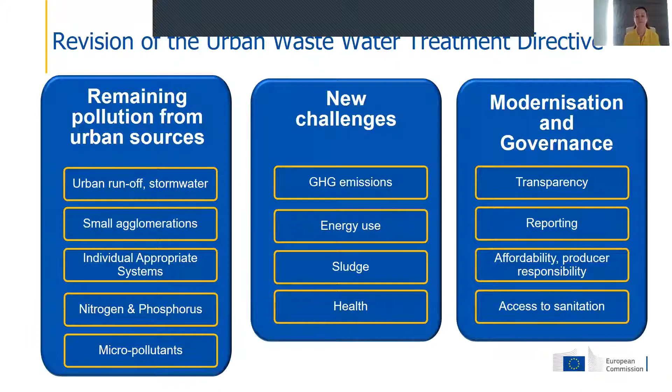I point out that for collecting systems, whereas they aren't as predominant as for wastewater treatment plant facilities, there's embedded carbon, there are direct emissions, and the energy usage of conveying flows to treatment. And under modernisation and governance, to point out that digitization does lend itself to more effective and efficient operations, monitoring and reporting. So with remaining pollution, in the evaluation, we did quantify what these other areas of pollution that could be further addressed going forward would be.

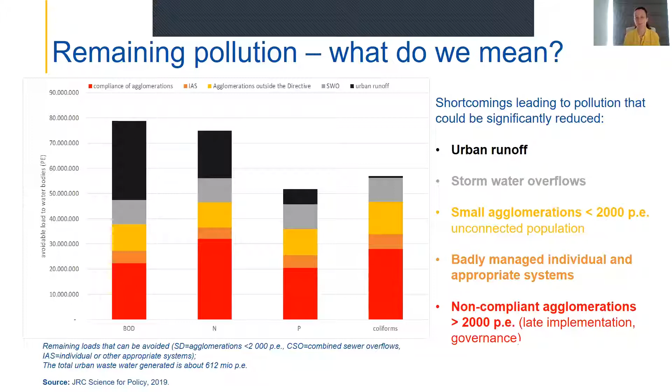5 main areas. We quantified them in terms of load for BOD, nitrates, phosphates and coliforms, including urban runoff and stormwater overflows. There's also issues with non-compliance with the current directive, small agglomerations and small individual and appropriate treatment systems. So we have a basis going forward, because everything we do is evidence-based, whether it's to do with the science and the modelling or cost-benefit analysis.

And also of relevance to point out would be, and this is from the second River Basin Management Plan cycle, 2016, both stormwater overflows and urban runoff are significant pressures, and they could be expected to increase due to further effects of urbanisation and climate change. Obviously, the situation can differ from one wastewater agglomeration to another, depending on local conditions and how the collection system in place would operate. So a revised directive could directly contribute to achieving objectives of good ecological status and good chemical status.

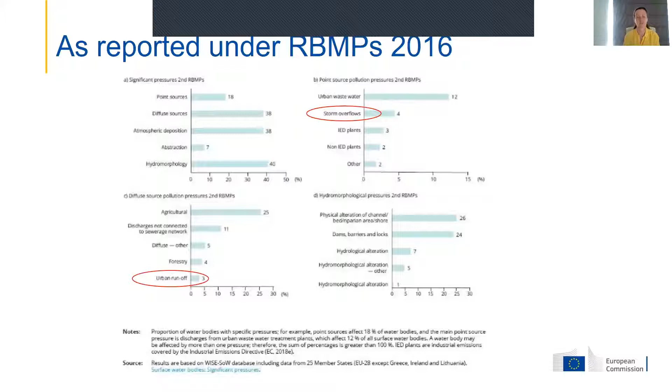Again, to wrap up, and looking forward towards some possible solutions, again, from our previous stakeholder engagements, which some of you may have been involved with, we have presented an outline of approaches that can tackle stormwater overflows and runoff. So there is the strategic, integrated approach. There are some very good EU examples out there, but it wouldn't be the case that at the moment it's systematically applied across all member states. The approach lends itself to better planning of infrastructure, leading to the delivery of infrastructure that is fit for purpose and future-proofed as much as possible.

This approach does require a number of competencies, including wastewater operators, urban planners, those responsible for monitoring water bodies, for example. It could include a lot of collaboration and coordination across various stakeholders at strategic and local level. It can reduce the amount of stormwater runoff collected through source control. There's an opportunity also to treat urban discharges more locally. And a lot of this type of work that's in place already requires a lot of mapping, predictive modeling, and even real-time control. And that covers the first policy.

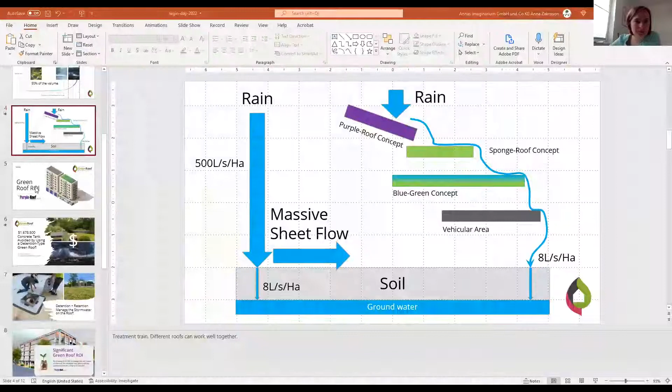And one thing some of the green roofs also provide, not all of them, is a detention capacity. We've spoken a little bit earlier as well about stormwater management. So detention can basically reduce, maybe I can just show you a slide on this because it's much easier to understand if I just show this. Otherwise it becomes so hypothetical. So let's see if I can get the right slide up.

But then we still have about 50% of the volume represented by 20% of the events, and these are the ones that are extreme weather events. You can see a microburst here on the picture. And they basically cause flooding. And when these events occur, the green roof can be oversaturated, or maybe it's a multiple day storm event where the green roof is already saturated when it starts raining.

So for this, we need a capacity of the roof that is basically slowing down the runoff. Different types of roofs can achieve this, like blue roofs, blue-green roofs, purple roofs, and so on. So this is a different issue. So there are two stormwater issues. One is the reduction of the annual volume that ends up in the sewers, which is really positive for the cities. But then there is also what I would see more as a project related issue where you need to satisfy the requirements of your stormwater engineer.

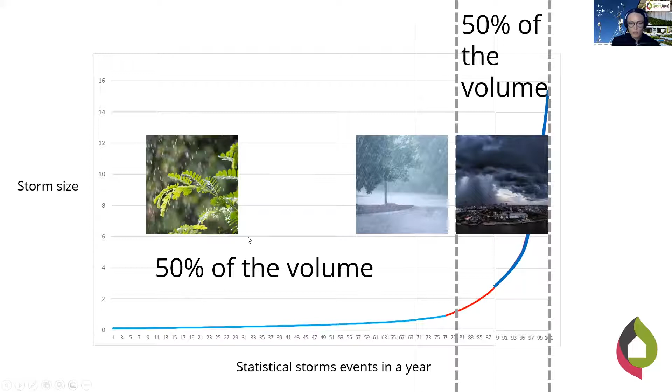That can be, for example, through a stormwater tank with an orifice restriction, so that you know the outflow is always within the limits of 8 liters per second and hectare, which is common in most cities. Manage your stormwater on a roof, which basically means that the space on the ground can be used for other development or whatnot. So I can maybe show you a picture of this.

For example, we had examples in New York City where they had massive stormwater tanks underneath the building. So you can free up that space, manage stormwater on the roof, and then you have a lot of space available for income generating activities that can create an ROI for the roof. But in order to do this, we need really, really solid data, because stormwater engineers are not satisfied with gut feelings or hunches.

And another thing is that the runoff coefficients currently in use, especially here in Germany, if I may speak frankly, are not actually useful for green roofs. They were developed in order to size pipes. So when they're used for green roofs, we do not really get the full story. Especially with detention type roofs, because the runoff coefficients assume a linear relationship between what is going in and what is coming out of the roof. And if the whole point of the system is to have a built-in delay, there's no linear relationship anymore.

So the runoff coefficients are something that I hope will be abandoned at some point, and proper stormwater modeling will be used, which is used in most other stormwater purposes. It looks very different from country to country within the EU as well. But this is something that I think would be very useful for everybody, because it also opens up the possibility for an ROI, especially for detention type green roofs. Yeah, that's maybe what I have to say about that.

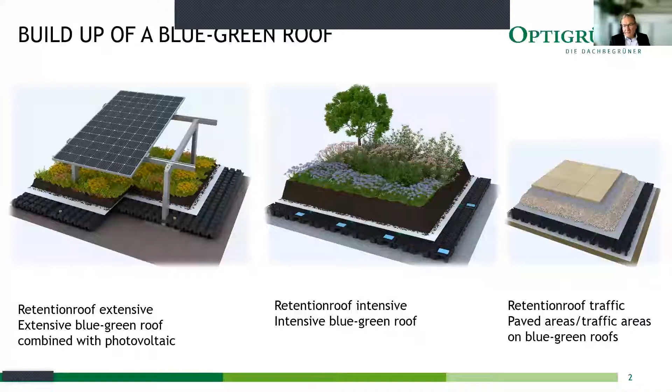The rainwater is stored underneath in these elements, which are between 60 and 150 millimeters high, and then of course they can store from 55 to 140 liters per square meter. So that's the principle. This is our idea how we could build resilient cities for the future. So what we do is a combination of green roofs and underground tanks and infiltration units. And the basic idea is that we store the water on the roof.

We have a flow restrictor in the roof, and then if the rainfall comes, the flow restrictor keeps some of the water on the roof, and the excess water goes into these underground tanks and infiltration units. And if we need water on the roofs, then we pump it up again. So our idea is that we can restore this natural water cycle.

This natural water cycle, basically for the middle of Europe, is about 70% evaporation, 20% infiltration, and 10% runoff. It always depends on the area a little bit, but this is the rough figure which we try to restore. So 70% is evaporation. Most of the water should be evaporated, and of course by evaporating the water you have all those cooling effects. You have the effects of healthy plant growth and so on, all the effects of green roofs.

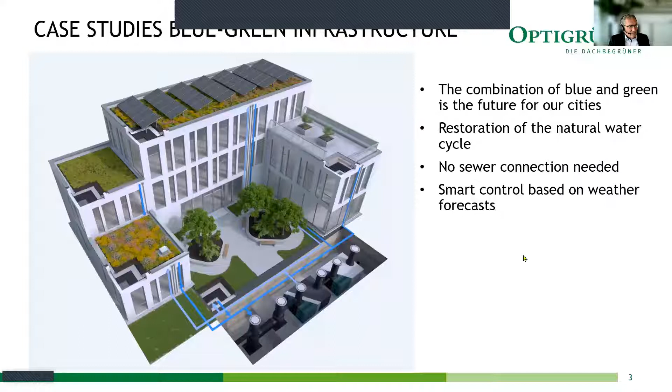And let's say if we have a storage capacity of maybe 80 liters or 80 millimeters of rain per square meter, you know that an 80 millimeter storm event is a very heavy one. So this definitely can help prevent flooding. So those systems, they are in place. This is one of our most important businesses right now. It picked up maybe 7-8 years ago, and I'll just show you 2 examples which we did lately.

This is a case study in Nuremberg called Eberhardshöfe. The whole property here was newly developed. This used to be industrial usage before, so everything was torn down, and then they developed a housing area. This was built in 2020, and the whole area has about 4,700 square meters of intensive retention green roof.

These are those areas below here or here, with parking underneath, and about 6,950 square meters of extensive retention green roofs. These are the areas up here. And as you can see, it's a multi-story apartment complex.

And what we always do for projects like that, we calculate a total water balance. This is based on stormwater modeling. It's not using those values from DIN norms or other European norms. This is based on 30 years of past rainfall every 5 minutes. So you can buy those data. We put those data in our simulation model, and based on the past rainfalls of the last 30 years, we can calculate this total water balance.

And in this case, we had an average rainfall per year of 600 millimeters in the Nuremberg area, 0 runoff, infiltration of 167 millimeters, and evaporation of 435 millimeters. And this is basically close to the natural water balance. So infiltration 25% and 75% evaporation. This was done on this project.

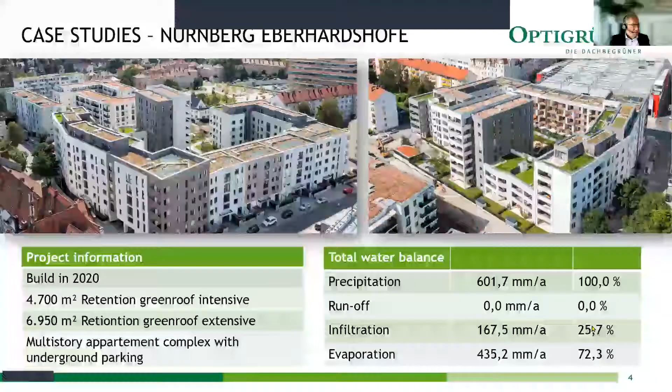The next one I show, this is the office building. It's in Karlsruhe in the southwest of Germany. It's the headquarters of an insurance company. It was built in 2018. Here we have a combination of solar green roof. You can see them up here and here. These were about 507 solar panels. Don't ask me about the megawatt peak, but this is quite a decent size.

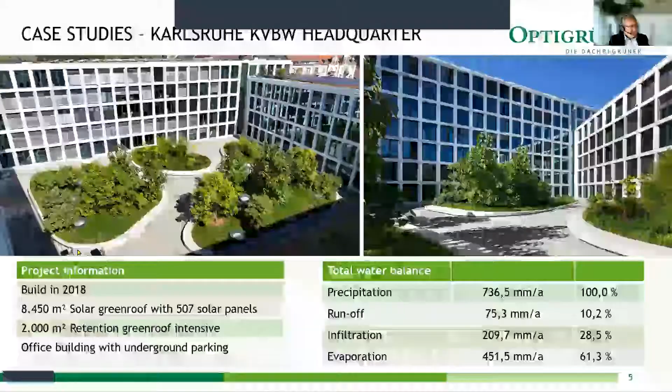And then we have a 2,000 square meter intensive retention roof. This is this area here, and it's combined green and pavement areas. Here you can see some terrace for the canteen or to have a coffee, and the total looks kind of similar.

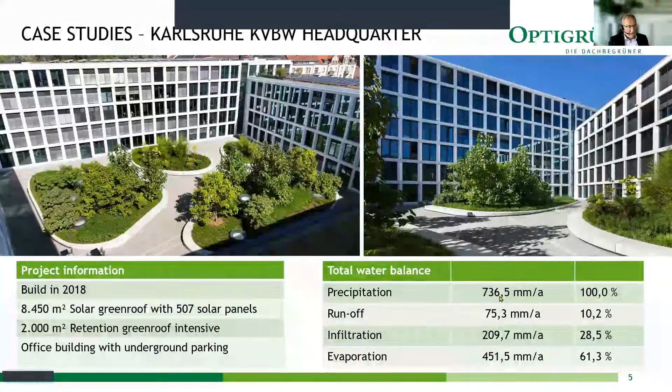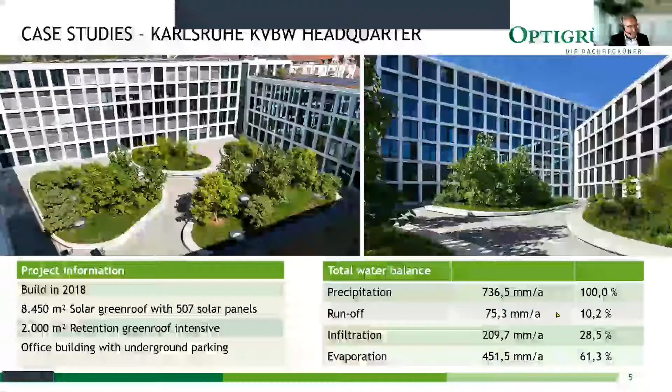Here we have an annual rainfall of 740 millimeters in Karlsruhe. In this case we have a runoff of 10%, 75 millimeters. So there's a connection to the public sewer system. We have infiltration of about 209 millimeters and evaporation of 451 millimeters. So those projects I just showed you, they are really common to us, and some other examples.

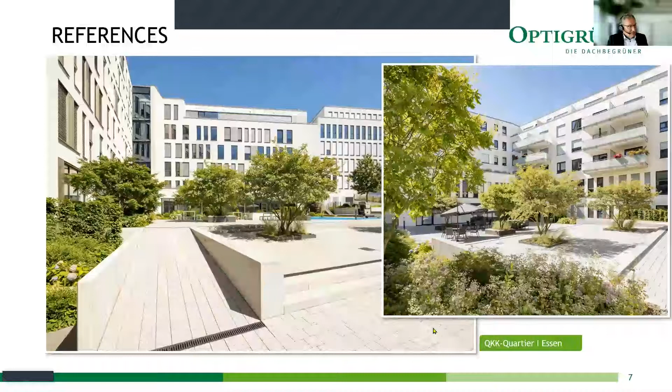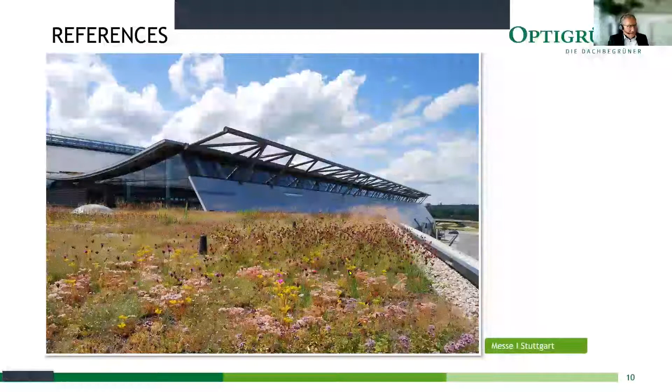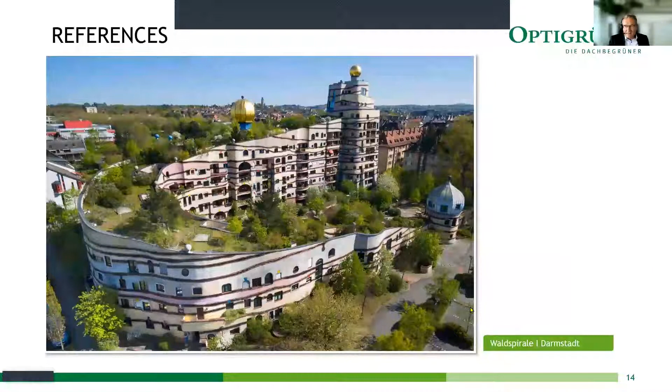Okay, thank you. Yeah, there was the other part of the question about the signals from the policymakers. What helps us a lot is if the cities and the policymakers have a clear idea what results they would like to have. So it's much easier for everybody if there's a clear statement. Okay, we want to have a maximum runoff of, let's say, 1 liter per second. Then it's clear. Then the property owner, the building planners, they can find solutions how they could achieve this goal.

I think this is much better than telling you specific things about a green roof build-up, because every green roof is different, every location is different. So I think it's much better to make statements on what is the goal, what has to be achieved, and then the industry and the planners, they can define the best solution for that.

I like this concept much more than clear statements like you have to bring 10 centimeters of substrate, because of course you have buildings where 10 centimeters don't work, or only work if you add extra concrete, and that's not really productive. So I think leave it to the intelligence of the planners and the industry to find suitable solutions, but you need to tell them what kind of result you want to have.